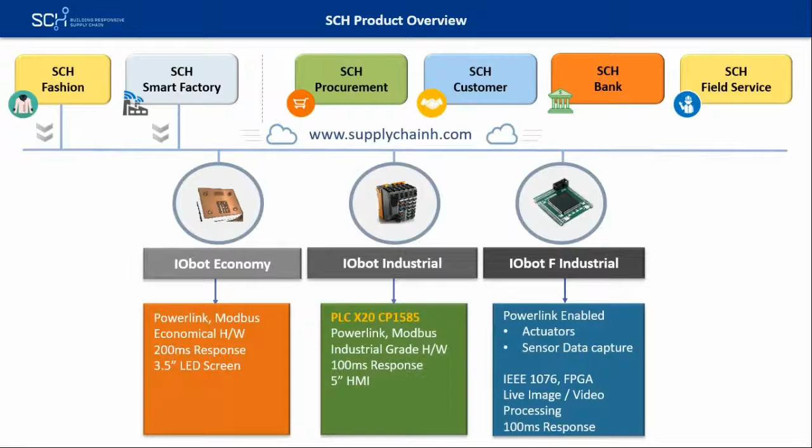The industries have got different types of maturity as far as the automation systems and manufacturing systems are concerned. Considering this variation in the complexity, MES systems and ERP systems are very difficult to connect to. There are high-end systems in which it's easier to connect, but for different systems it is very difficult to connect.

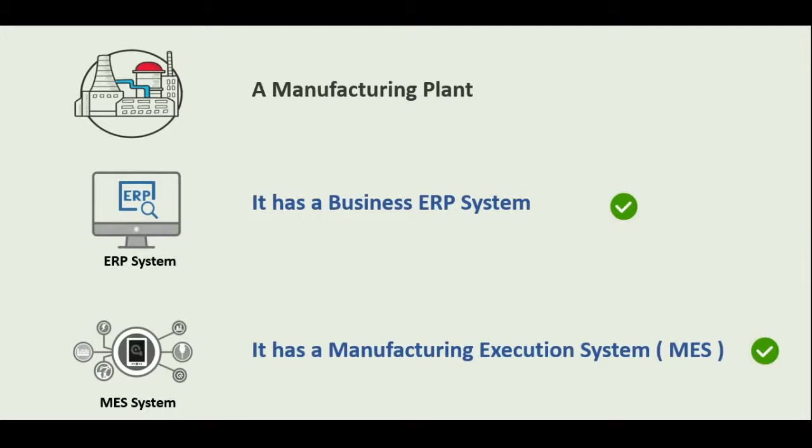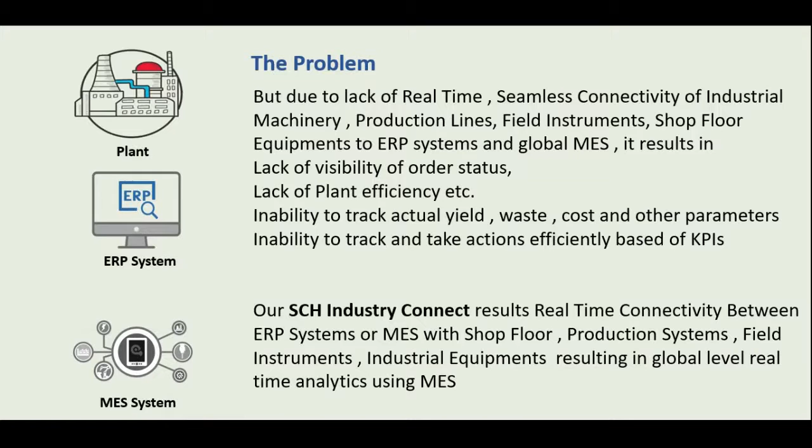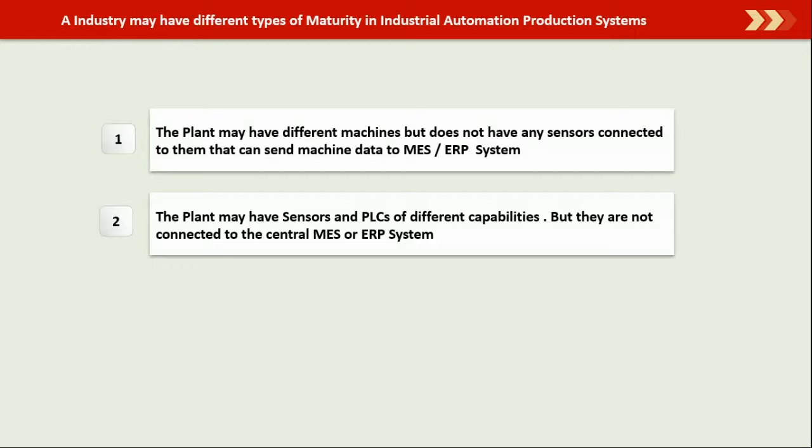The solution we are offering is called the SCH Industry Connect. In order to do that, we need to standardize the communication protocol, and second is the ability to map the different maturity levels of the systems using this SCH mapper to the standard. The standard communication protocol can speak to and communicate with different MES systems and ERP systems.

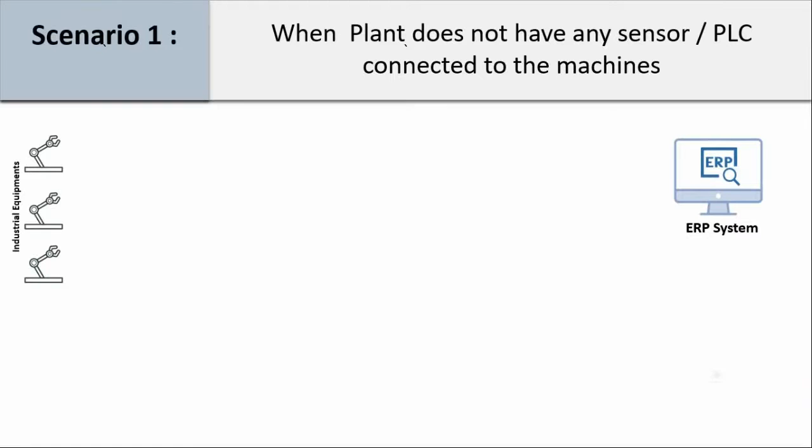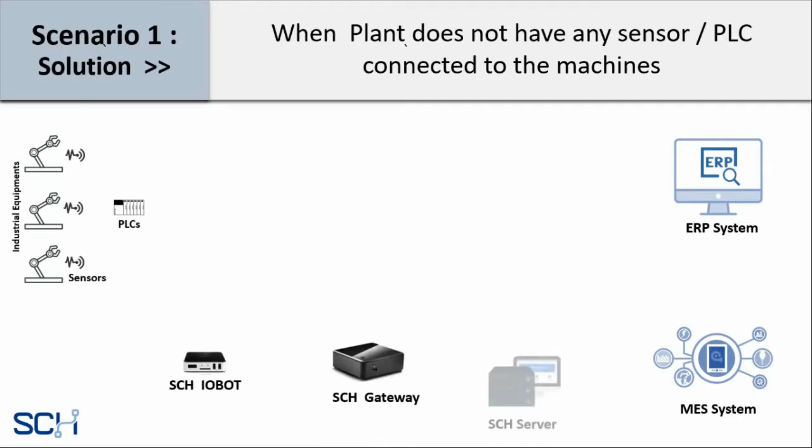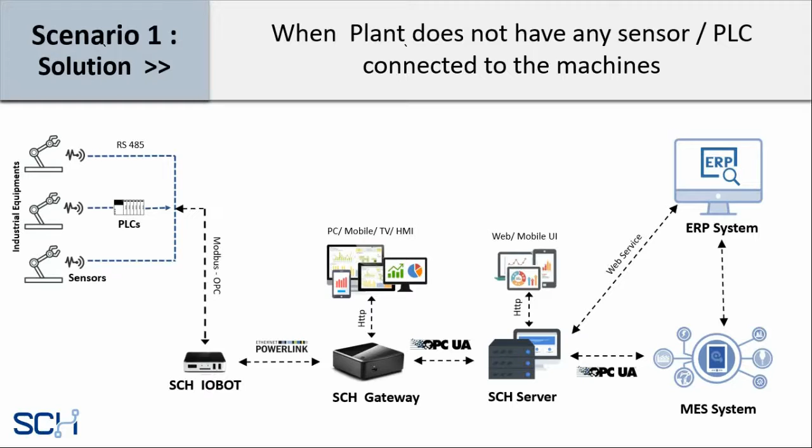Out here you can see on the left hand side, we are picking up different types of industrial automation systems. It can vary all the way from fully automated SCADA systems to different categories of PLCs and the I/O system.